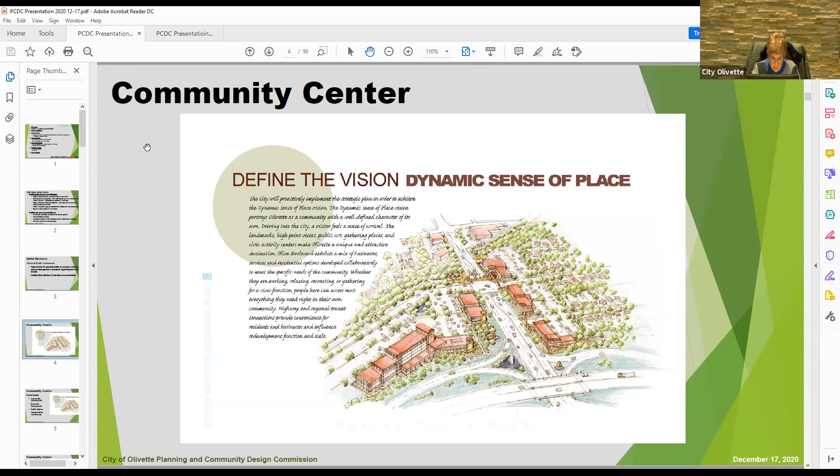In the efforts to become a dynamic sense of place, the commission is encouraged to focus on four areas: community development, economic development, public spaces, and transportation connections. Within each of these focus areas, there's a variety of objectives to meet those goals.

In community development, we talk about equity and various housing types and options, and things of that nature, our identity, our architectural styles.

In economic development, we focus on the Olive Boulevard corridor, the industrial parks, and positioning all of that to be a leader within the region in the St. Louis area.

Public spaces define our community as a well-defined community that's attractive, that has a character of its own, where even the sidewalks are unique and distinctive to our community. The spaces that we create before our commercial areas are unique and distinctive.

Transportation connections don't necessarily just mean the general vehicle, but connections both to public transit, to highways, to county road thoroughfares, to pedestrian areas, to the Centennial or Greenway trails, ensuring the community capitalizes and is well connected both north and south of Olive and east and west of Dielman.

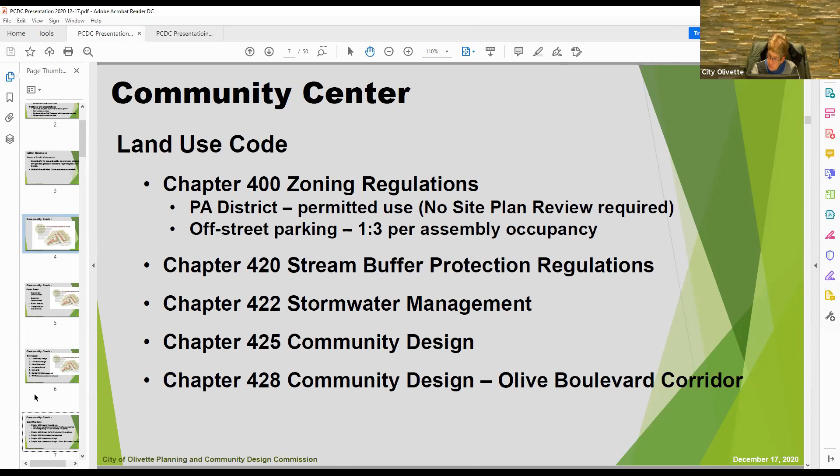So it's a pretty exciting building. For me, of course, it's exciting because it's another check off on our strategic plan of accomplishments.

And I am now going to transfer over to our city manager, Ms. Sondag, Ms. Tucker Knight, who is our Parks and Recreation Director, and also Katie Aholt, who is with the team, serving as our general contractor or project manager for that process.

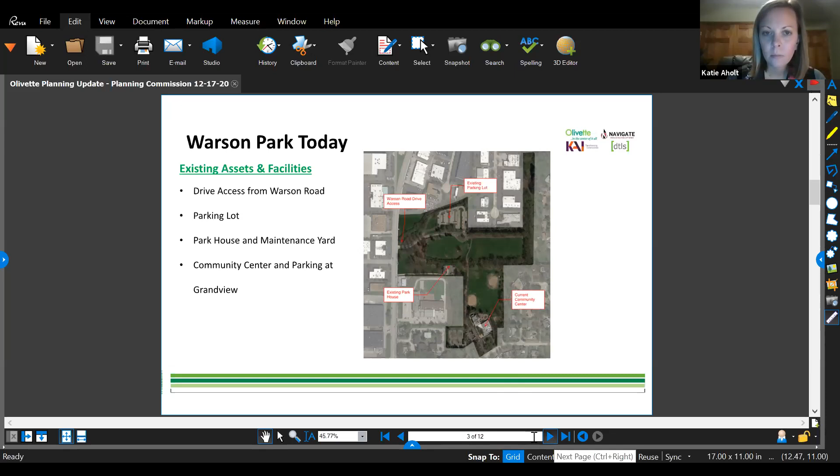Zooming in on the community center site, we are reutilizing the former site of the old ice skating rink. The new building we are designing is a single-story building, approximately 27,500 gross square feet. It reuses the current drive lane from Warson. The project includes mill and overlay of that road and some partial replacement of sidewalks, so we're able to use the base of what's there while making some improvements as part of the project.

We will also be supplementing the existing parking lot with an additional new parking lot adjacent to the building that will provide ADA accessible parking spaces and connectivity with the GRG Centennial Greenway. Overall, we're looking at about 120 existing parking spaces with the addition of 37 new, for a total parking count of 157.

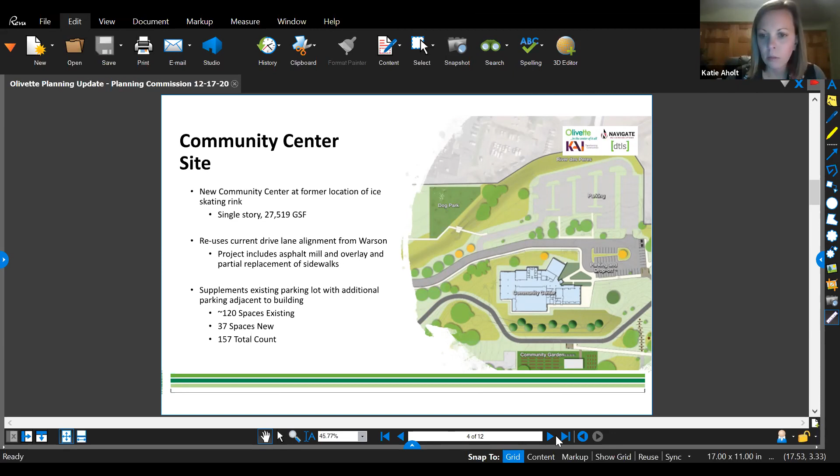The green area represents the Centennial Greenway, currently planned to stop over at Warson Road to the west. For the sake of this presentation, it will turn north and head east into Indian Meadows and connect beyond. The Greenway will provide an opportunity to access the headwaters of the River Des Peres - that's a unique feature to this area.

We are planning for a new maintenance facility to the south of the park. This allows us to demolish the existing park house and eliminate the old retaining wall - a 3-tier retaining wall in very poor shape at this time. We'll be able to grade out a nice slope with some plantings connecting the trail down towards the community center site. Eliminating the retaining wall and that gentle grading of slope, we think, really connects these two spaces together.

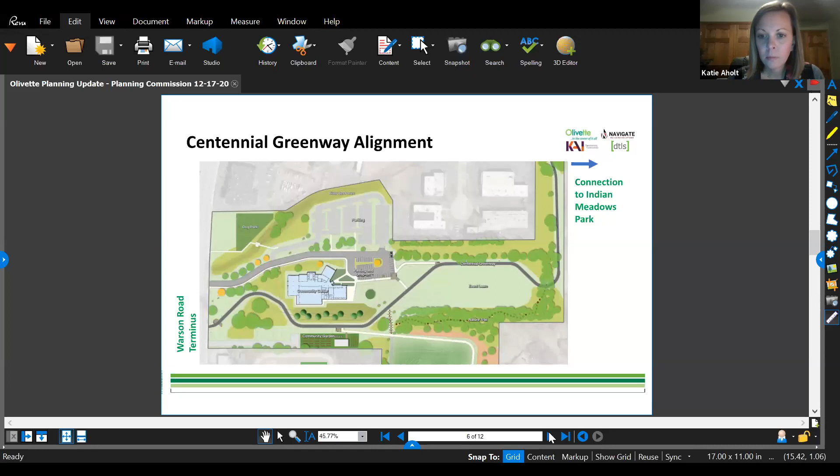So the next slide shows the floor plan as it stands today for the community center. It's about a 27,500 square foot building with multiple spaces for the community to gather and share.

We've had a discussion today about wanting this to be a place where people can come sit and drink a cup of coffee, read the newspaper, or play a card game, or come in inclement weather and be able to walk a path through the building and still feel like they can get some exercise in. So this plan represents those things.

When you come into the vestibule of the building, there will be a welcome desk and also a fireplace area. Beyond that will be a stretch of lobby with informal clusters of seating, which can be flexible and rearranged to accommodate various needs or activities going on in the space.

To the top of the page here, you'll see an indoor playground. This is one of the unique features of this facility, and I think it will be an attraction for people even outside of the Olivette area to come explore what this facility has to offer.

The zone you see here in orange is a cluster of offices. This will be for Parks and Rec staff to support both the facility and what's going on in the greater park system in Olivette.

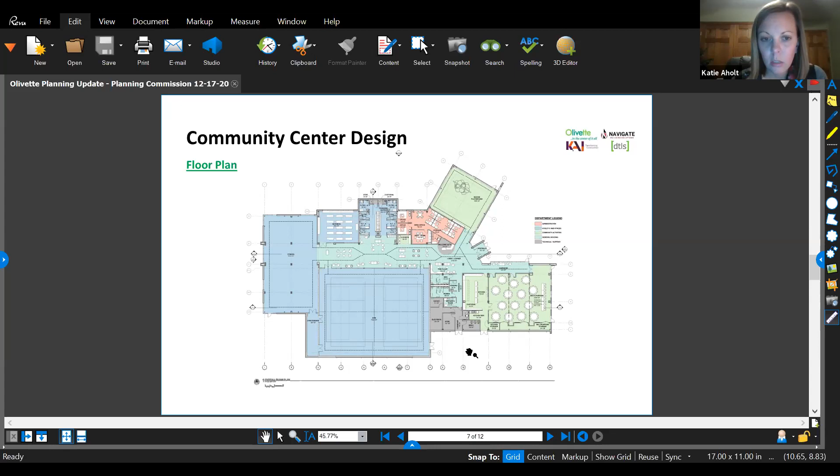From here, I'm going to turn it over to Joel and Aaron and let them walk you through the exterior elevations and the process surrounding the material selection.

Thanks, Katie. I'm Joel Kirshen, project manager for KAI on this project, and with me tonight is Aaron Keistler, director of architecture. Since Aaron was very deeply involved with this and will do a better job explaining his thoughts, I'm going to let him get into the details and walk us through the exterior of the building.

Thank you. Thanks to everyone for having us to show the design of the building. The design team and the city and the Parks and Rec Commission have been very collaborative, and it's been an awesome process to work with everyone.

So this is a view of the front entrance of the building that you would see from the parking lot. However, the next slide is actually what you would first see as you enter the park.

We wanted the entrance to the building to be open and kind of funnel the community into the building through natural materials of stone and wood-look metal panel, and then using a contrasting color of charcoal gray metal panel, kind of to help follow some form and function of the building, but also start to tie into the natural setting of the park as well.

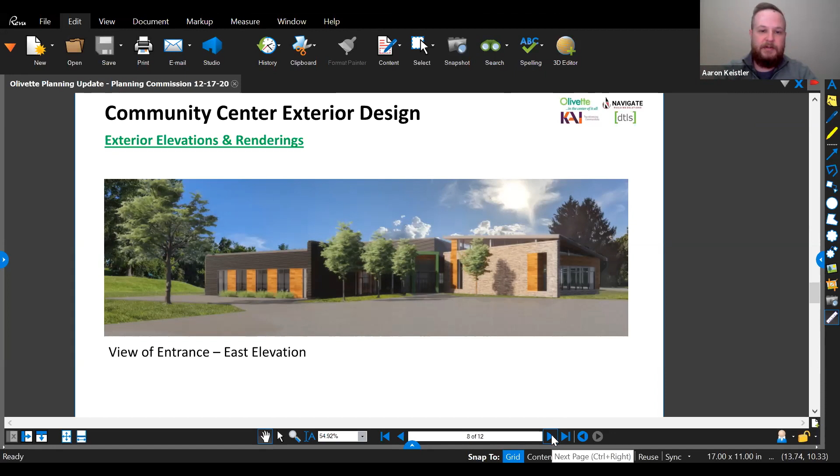So as you pull up from Warson into the park and up to the community center, this would be that corner of the building. The actual entry drive is a little bit lower in elevation from this. But here you can see that green portal that would tie the entry to the building through the fitness. So the corner of the building you're seeing here is the fitness room.

And then to the left of that, the next form is the aerobics room. Then the stone mass form next to that is the changing suites. Then tucked between that and the playground that you see at the end is the office suite area.

And then in the background, we settled on a lighter gray metal panel for the gym so that it fades away into the background and it's not the forefront, to keep the building at a better scale than a 30-foot tall gymnasium within the park.

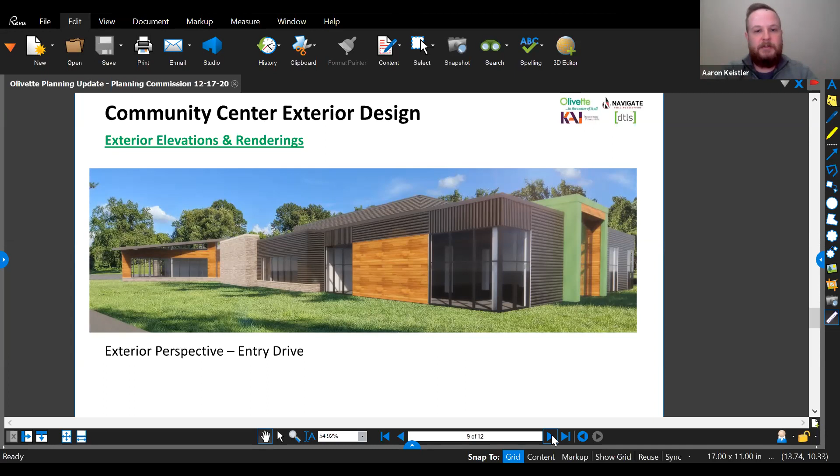So around the exterior, or the backside of the building if you want to call it that - the quote-unquote backside of the building - we definitely wanted to pay attention to that, working with the city, both Parks and Rec and the mayor. We didn't want to just call it the backside of the building and leave it as the backside of the building. We wanted to put a design to it.

So the same materials that you see on the front are carried around the back, with the exception that instead of using the stone veneer you see on the front, we're doing a split-face CMU on the back. That would be the same color palette, just a more cost-effective material. But with the GRG trail coming behind the building, there's going to be a ton of public, both Olivette residents and out-of-town residents, riding their bike or walking or running past the backside of the building. So it didn't want to just be a quote-unquote backside of the building. We wanted to carry the same material palette around.

And here's a better shot of the multi-purpose room patio where events could come in and come out. That could be a part of the package as well, of people renting the space.

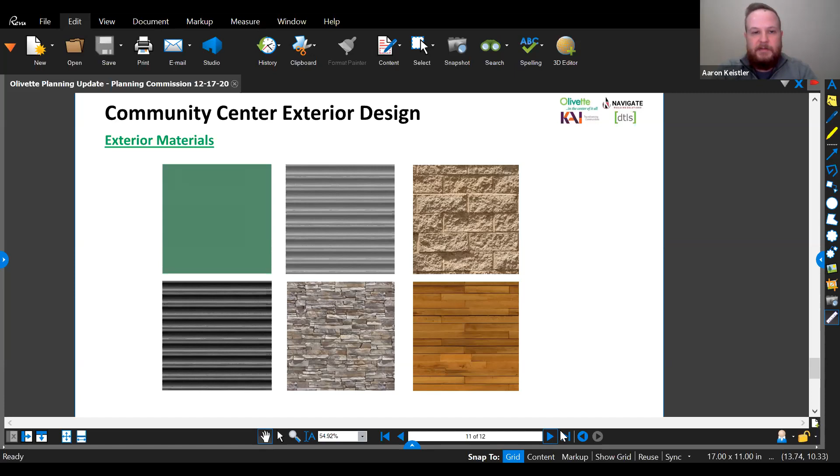Next slide, please. So if any questions or feedback, would love to hear from you guys. Anyone have any comments?

If I might just add a couple of things. One of the things we were trying to do was bring some connection between the city center and the community center, but we didn't want the community center to look like a government building. We wanted it to be warm, we wanted it to be welcoming. Beverly was very keen on trying to bring the natural woods and stone into play here, and those will also be carried throughout the interior of the building. I think Beverly's goal is that warm, inviting place to be, both approaching it from the outside and carrying that forward into the inside.

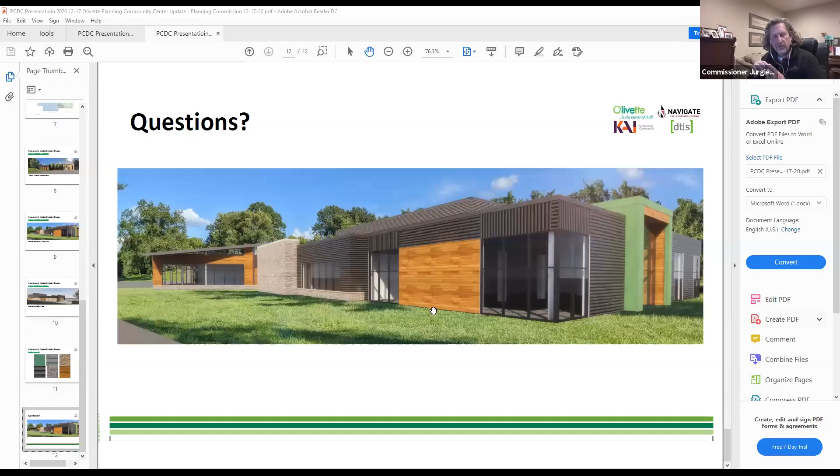I did have one question or comment to make, about the location of that roof ladder for the gym. When you're looking straight on at the building, it looks like you can see it right above the entrance, so I wasn't sure if that could be slid down or moved so it wouldn't be as prominent. I noticed it on the cover of the drawings. We've talked about that in our meeting, and I can't remember, Katie or Aaron, where we ended up with that, because that was something we noticed on the actual drawings, on the cover sheet, on the plans.

The only other comment I had about the gym is whether there will be any natural light let in, in the ceilings or upper walls. Yes, there is. We have a series of skylights included over the gym specifically. We're also trying to incorporate a light shelf running down one edge of that center lobby space, so there will be some natural light coming into that lobby space up against the gym. We're working to keep the edge of the gym that's open along the lobby open, using one of the newer glass products, so there'll be a lot of visibility there. And where that center gathering living room space abuts the gym, there'll be some sloped glazing up at the roof that will allow light in there too.

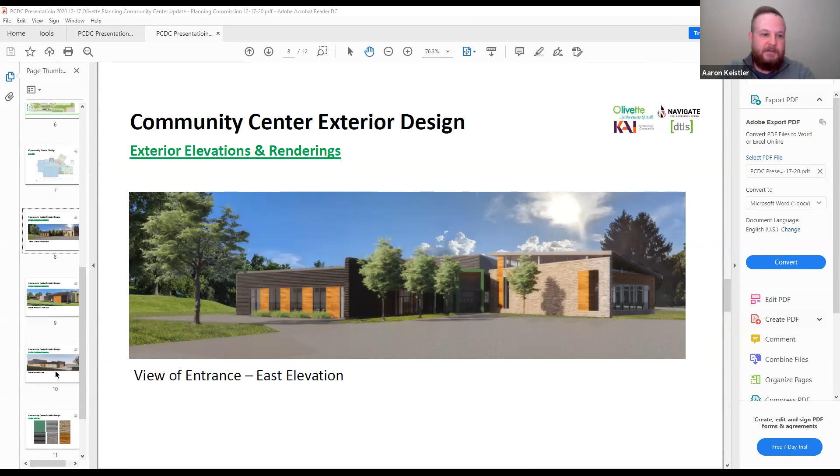It occurs to me that the trail proposed for the south side is elevated, so you're going to be looking down at this building. I appreciate the work you've done on that south elevation, but to me it still looks like a back elevation. I'm not sure how worried we are about what that image along that side looks like, but I do think maybe some more thinking might help, to see what other options there are. I think generally it's nice, but to me that looks like that's definitely the backside of the building.

I appreciate that comment, Mike. We've gone through, we probably have more iterations of the back than we have of the front. Part of the issue is somebody asked about the windows. Beverly and the assistant director, Don LaChance, have both had gyms where there've been windows, and people have had a lot of difficulty playing volleyball or basketball with the sun glare. There are things you can do to help with the windows, but they're really out of our price range. So what we really have is a big wall. We've talked about what other things we could do, and we've talked with GRG about it as well.

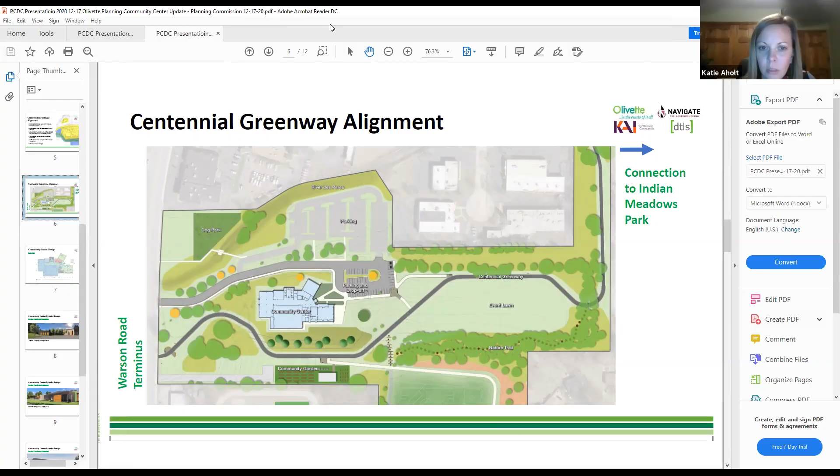Thank you all. I have one quick question. Oh, we were so close. So I have a question about schedule. You know, this looks terrific. So when will we see it in the ground?

Great question. As Aaron mentioned, we are currently wrapping up what's called the design development phase of the documents. The plan is to have those wrapped up after the first of the year. The phase following that is construction documents, when we'll actually start detailing out very specific components of the building. Our goal is to have that package wrapped up by the beginning of May. So May is when we will submit for permitting, start preparing the package for general contractor bidding, and really start transferring from design into construction.

So we're anticipating bidding through summer of 2021, and contractor mobilization in August. Hopefully late next summer we'll start seeing some dirt moving around and some big activity. I think that's exciting. In terms of overall schedule duration, right now we're looking at late 2022 to have everything wrapped up. We think there's potential the building could be completed prior to that, but landscaping is such a heavy component of this project since we're working throughout the park, so we want to make sure we don't cut ourselves short and try to utilize that late planting season in the fall of 2022 to really wrap things up.

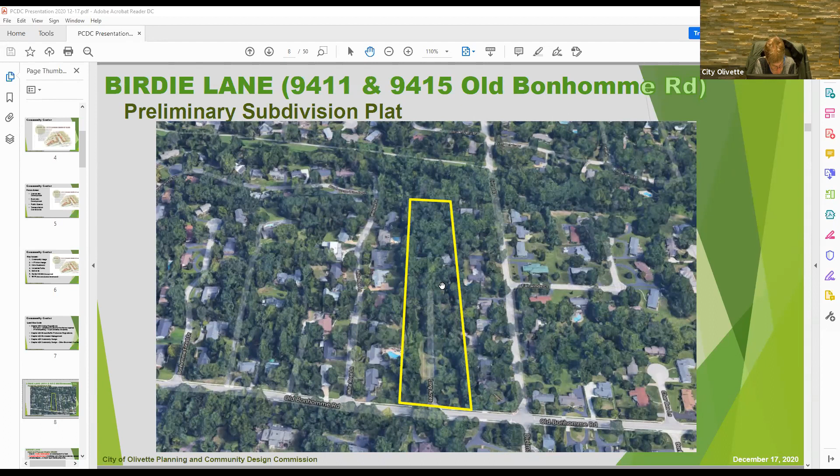So this is the location. It's nestled between Dielman Road on the eastern side and White Rose Lane on the western side, but it's two interior lots, so they don't have any direct access outside of along the south of Old Bonhomme.

The purpose and intent of our subdivision code is to ensure orderly development, to protect and conserve value, both the buildings and improvements and adjacent properties, to ensure proper legal descriptions and documentation. Most importantly, to make sure that they're buildable, properly oriented, and adequately infrastructured with services and facilities for these lots. We establish standards for design and ensure a beneficial relationship between the location and orientation of the lots and the street system, specifically to ensure that safe access and maneuvering of emergency vehicles is provided.

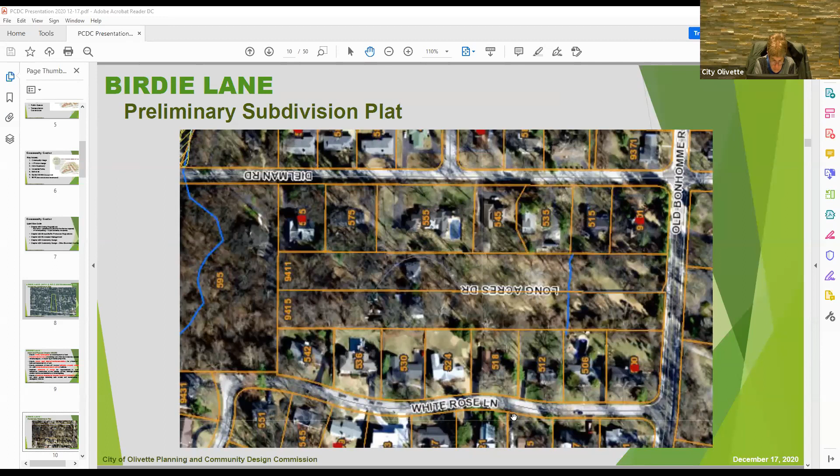This is rotating those two lots on their side now, with the south being on my left-hand side, north being on my right, south on my right, north on my left. Again, White Rose is down at the bottom, Dielman Road up on top. And I just flipped everything. Again, now Old Bonhomme Road, which is the south, is on the right. And you can access the subdivision off a new street that would be extended north to south with a cul-de-sac.

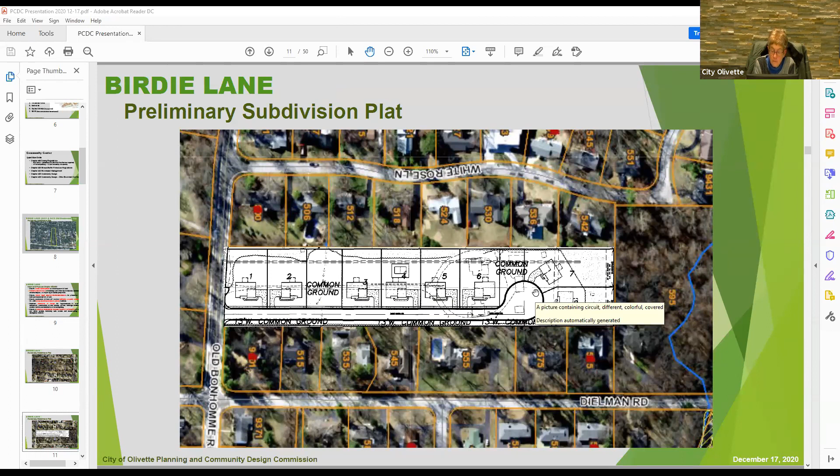There would be two lots, a common ground, then four more lots, 3, 4, 5, and 6, then a common ground, and then lots 7, 8 here at the cul-de-sac terminus. Under this configuration, they would be limited to 8 lots. Without the common grounds or looking at other alternatives for the street, there was potential for maximizing up to 10. We even had discussions about rezoning and density on the site, but in the end, the petition they submitted was for the 8-lot subdivision and providing those 2 common ground spaces.

So our general strategic plan goals are, of course, community identity, economic development, transportation connections, and open spaces. We talked about those earlier. I'm going to go through them now.

The property is zoned single-family residential, which provides for the construction of new detached single-family residences. The minimum requirements for dimensional criteria are 15,000 square feet, 100-foot width of frontage, and 150-foot depth, which these 8 lots fully provide.

From our previous discussions, there's been a lot of focus on Lot 1, and we'll talk about the changes that have been incorporated. There was some discussion of the measuring of the widths for Lots 7 and 8, and we've had discussions about the common ground and the landscaping associated with that.

Stormwater, looking at it from a macro level, because the common grounds being provided are really stormwater detentions that help facilitate stormwater, but more from the Metropolitan Sewer District level. They're looking at it not just how stormwater impacts within the subdivision itself, but also the adjacent areas—at a macro level, where their detention systems will help improve stormwater as it comes down from the higher elevation areas in the west, and minimize impact to the lower elevation properties to the east, specifically along Dielman Road.

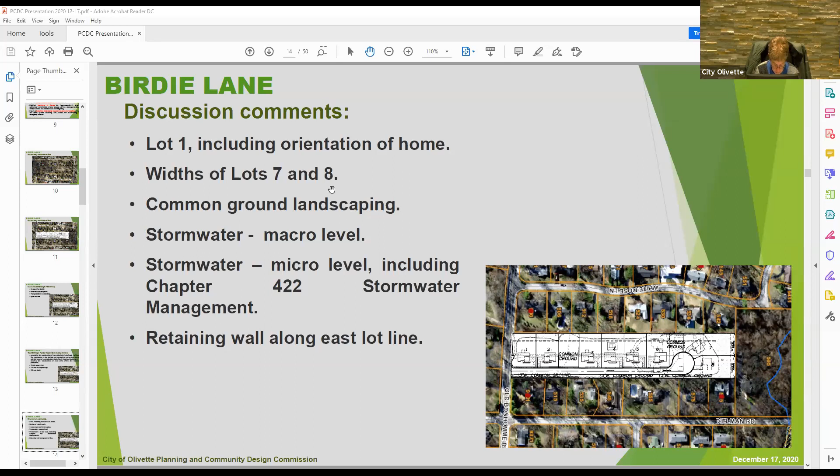Then there's stormwater regarding the micro level, which includes our Chapter 422, where each individual lot has to provide its own detention system—we'll talk about how that's addressed. There was also a retaining wall proposed along the east lot line, roughly behind a couple of properties off of Dielman Road, under that new street.

So long story short, this is Lot 1 that's been discussed by the commission at its past couple of meetings, specifically regarding the design of the new home.

When you look at it from that perspective, that's kind of step 5 in this process, if there was a series of steps. The design of the home actually takes place once the lot's created, and it goes through community design review, our Chapter 425, where our residential redevelopment design guidelines come into play, and the commission has authority over the design.

I think the commission's made it very clear in terms of their expectations for when this design comes in for the new home. Right now, we're looking at a preliminary plat and whether this lot can be subdivided—it's specific to that. From a staff perspective, the issues regarding design, though they come in later, matter because the more narrow a lot you have, the more restricted the design would be.

So from our end, we've been trying to coordinate and work with the developer, finding opportunities or ways to deepen the north-south depth of Lot 1, therefore providing more opportunities in the design that comes further down the line—what we would call step 5 of the process.

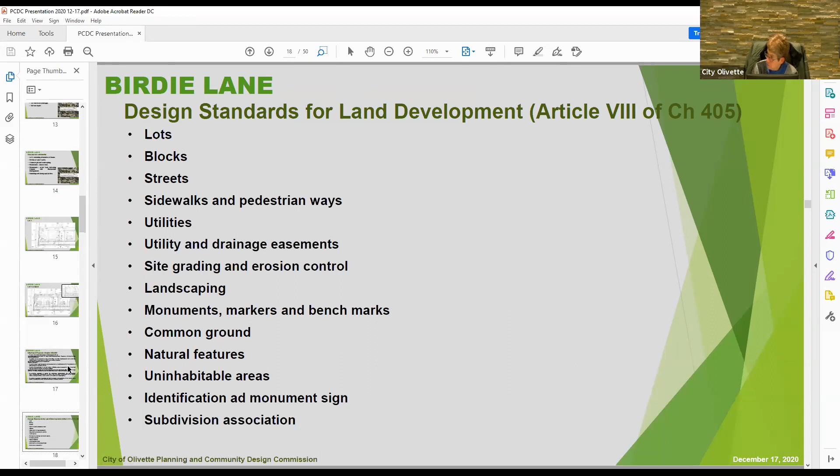At this point, I'm glad to answer any commission questions regarding what we tried to do with lot 1 and lot 2, because a majority of the discussions have really been focused on those. We're hoping that working with the developer in this collaborative response, reducing the common ground area and increasing the width of lot 1, will be sufficient to address what the commission's concerns were. From a staff perspective, this gives greater flexibility because the lot was really constrained, and that was more of a concern to me because it would limit some creativity. Now I have a lot that is a corner lot, but it's an oversized lot compared to the others, and would have more opportunities to provide flexibility in design, specifically the Old Bonhomme design.

Chair, before continuing, I know Jonathan has had other discussions, and I'd like him to address some of his comments and thoughts since he assisted in putting together that report. Sure, but first, before going on, I'd like to focus on getting lot 1 addressed, because holistically, for the subdivision as a whole, this has been the holdup. Anybody have any questions for Carlos at this point before we hear from Jonathan?

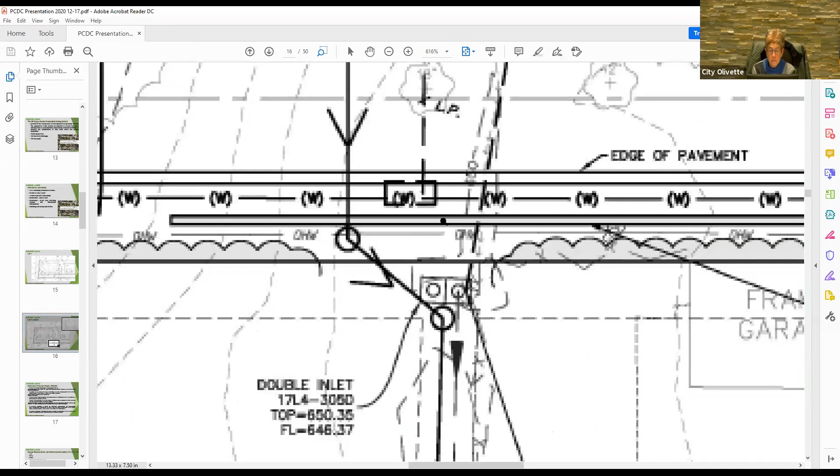There is a dip, and you can see why those detention systems are right in this area, which is where the highest point of the wall is at, 8 feet. Is there going to be a fence on there, Carlos?

It depends. It says fence. Okay, it says proposed retaining wall with fence. I know from a building code perspective, it depends on whether that's a walkable path. There is a roadway right adjacent to it, but it depends on what that distance is. In this case, they're showing that they would put a fence on top of the wall.

And if we can verify that with the petitioner, after some questions. Jonathan, did you want to talk with us? I think Mr. Trejo did a nice job going over most items.

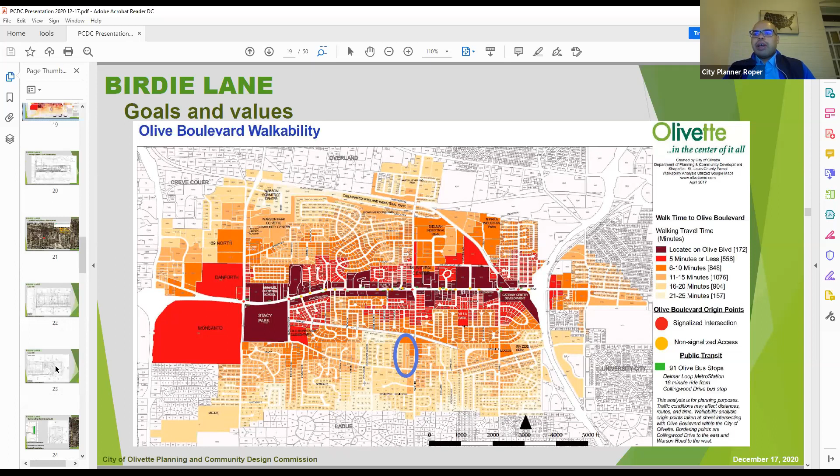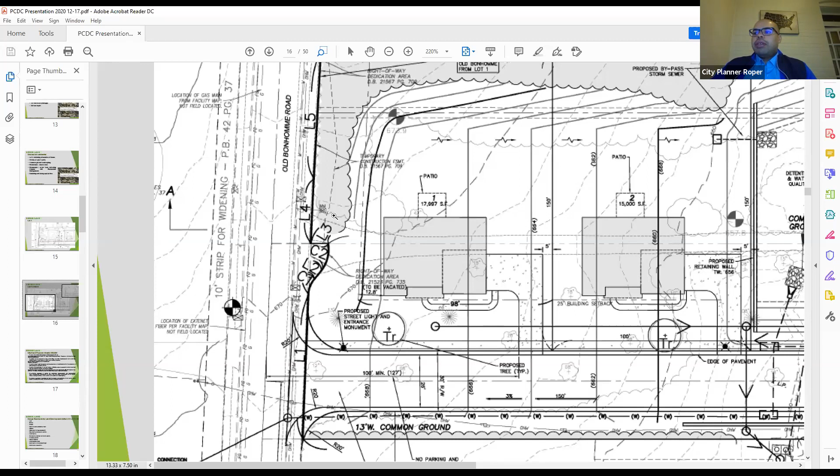Staff wants to stress the common ground area, and although there are landscaping requirements, I know Mr. Freeman on previous meetings shared a lot of nice landscaping on the street side, but also the common ground areas being that 13-foot width, and the stormwater areas - hopefully the expectation is a little bit more emphasis than just plain grass, but put emphasis on there.

The petitioners have also put what the Chapter 405 subdivision regulations calls a pedestrian way, where if there's opportunities to connect to any parks, walking trails, Olive Boulevard, commercial areas, or schools, take advantage of it. So in this case, they are putting an easement and curbs around one of the common grounds and around lot 7, if a future connection were to be made. I believe that is all I have at the moment.

Carol, I have one question. Again, Rob? How deep is the retaining wall between lots 2 and 3? Or, how deep is the water retention, and then the retaining walls on either side? I believe it gets up to, at that point, 5 feet.

So I'm going to look at it right now. I believe those two are both 5 feet. So by building code, I believe they would definitely need some type of railing or guardrail, just so someone can't walk right into it. 'Cause it's not shown if they're planning on putting something above that. Well, they would, with the building code, they would have to.

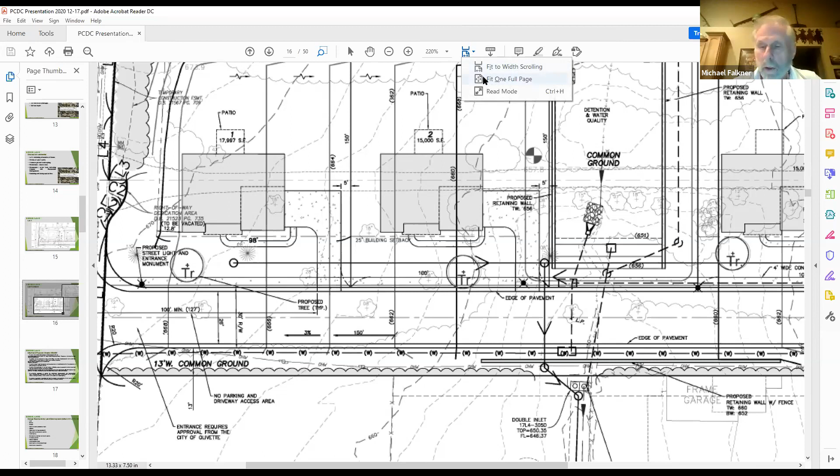Okay, Falkner, do you want to go ahead? I'd like to try and go over some of the concerns. Yes, thank you very much, Madam Chair. I'd like to go over and talk about some of the comments made by the commission members. I think number one is this property has been surveyed.

As far as that one individual who had indicated an issue, we'll be happy to meet with him. But this is a property surrounded by plats that have been recorded. We went out and found all the corners, all the record corners that are out there, and performed an outboundary survey on this property. We've actually got an ALTA survey on this property, so we know that the points out there are correct, and we will stand by those. But we will be willing to talk with any property owner who has concerns over those locations.

As far as the wall, yes, there was one individual who had indicated a concern about the wall, but his concern was more about what the wall was actually going to be and its color. As we stated in the hearing, we'll be happy to reach out to that individual, since he'll be looking directly at that wall, and discuss what type of color he'd like to see along it. Of course, we'll also pass that by the city to make sure they approve the color. It's going to be a modular block wall, so it can be in many different colors. We'll be discussing that with the property owner, since he'll be most directly affected by the visual of that wall.

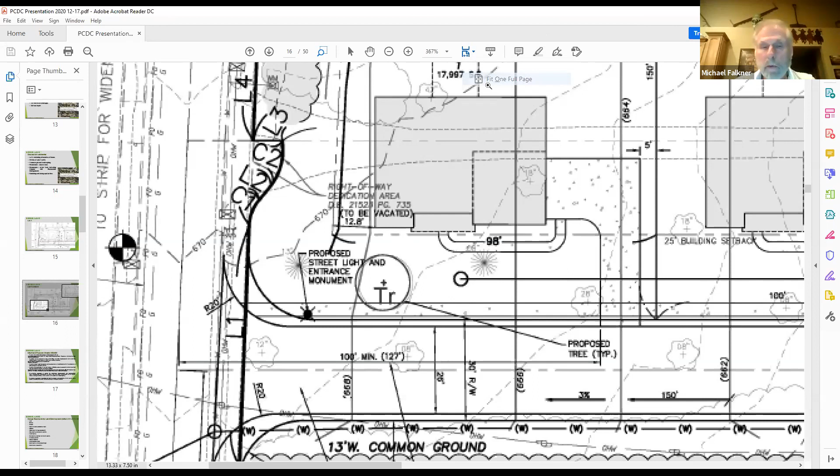That is correct. That would put the house about 28 feet, I'm sorry, an additional 12 and a half foot off of the 25-foot setback. So we'll be at 38 foot off the right of way.

But to answer your question, Carlos, yes, that distance now is 98 foot. That was due to discussing with MSD and allowing us a 30-foot setback off of the high water, so the house and driveway could exist within that area, which afforded us the opportunity to flip Lot 2's house, allowing us to move that 13 to 15 feet into Lot 1.

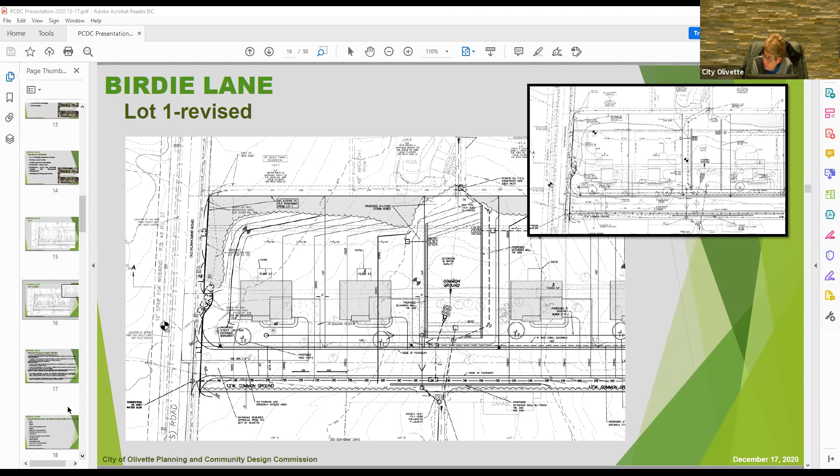There are none noted. We do have a revised plan set that you received PDF copies of today, and we've kind of gone through those reviews. I think they address the core issues, or a majority of the discussion comments that we heard over the past 3 meetings, which was regarding specifically Lot 1.

There were some good questions brought up today as we got closer to specifics on the grades, but those will be handled through subdivision improvement plans. The question before the commission is whether the commission is comfortable with the design, if enough emphasis has been put in about the expectation for the design of the home on Lot 1, which, again, in the previous 2 meetings, there was quite a bit of discussion on. The other things have been addressed.

There's still 2 issues that are kind of outside of the control of this permitting or the preliminary plat process. One, of course, is the retaining wall. The commission doesn't have authority to approve the retaining wall as one wall. That's something the commission would have to refer to the Board of Adjustment. Talking with Mr. Falkner, I think that's something they would pursue. If it's not approved or authorized, they would just continue with the design of tiering that wall, but they're concerned about how that would impact the garage.

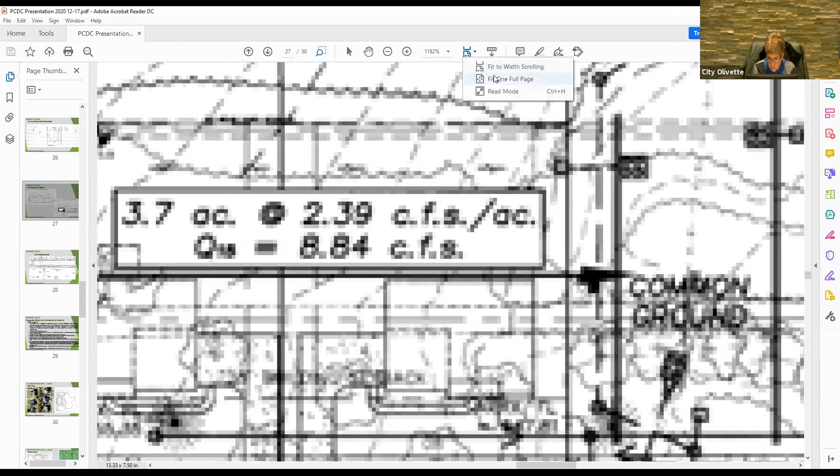When we put that ordinance together, they took into consideration all of this, and Chapter 428 is just looking at an individual lot. Again, it's kind of double dipping in the process, for lack of a better explanation, because we never anticipated that we would get an 8-lot subdivision. Most properties have already been subdivided, so it's rare that we see those.

So I talked with Mr. Falkner about that, and I think it's something that from the city level we should have a continued discussion about. It doesn't impact their preliminary plat in any way, but it will become an issue we'll have to address as they pursue individual lot developments on there.

Hey Carlos, this is Mike. Are you suggesting that the detention calculations have taken into account all the roof areas and what'll be coming out off the buildings, like what's required for individual lots, but that's already being taken care of on this macro level?

That's correct. In the preliminary plat, and as you get into the more detailed plans with the paper copies, they're showing all the downspouts, let's say in lot 1, are connected to a drainage system here that runs and releases into the common ground. That happens for lot 1, lot 2, lot 3, 4, 5, 6, 7, and 8 going into the front. But the rear roof areas release at grade, which is why they provided that undisturbed buffer area.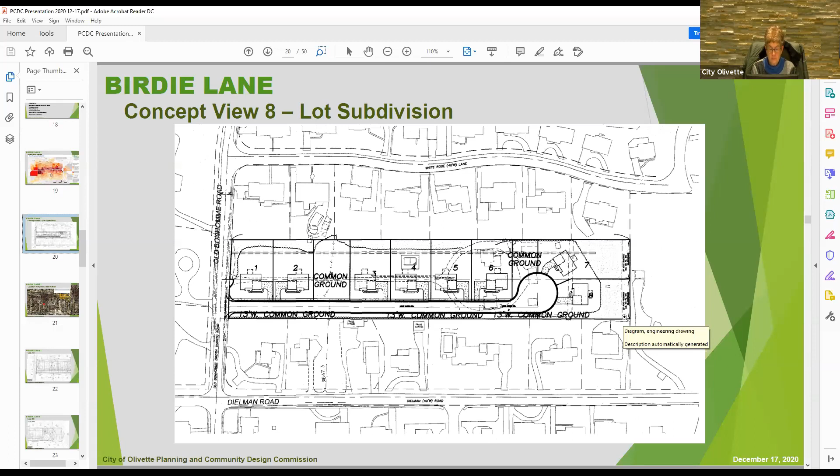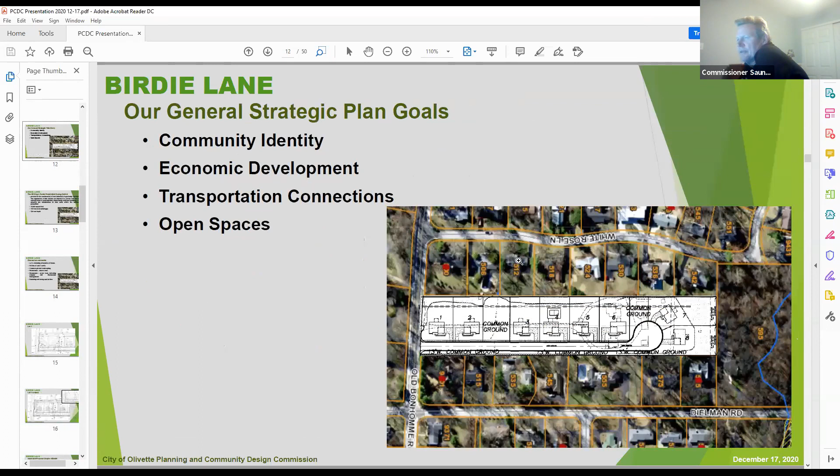But just by the fact that they're tied into a structure already, isn't it in fact being addressed at that point in time? So it meets the spirit and the intent of Chapter 422, however it's not compliant with Chapter 422 wording. We'd have to come up with some type of amendment, but not necessarily an alternative—just an acknowledgement that the detention system is being provided in the common ground areas as opposed to on the individual lots.

Interesting problem to have.

But it's still going to be piped, right? We're still controlling it. The downspouts are still connected—is that piped or is that just a swale back there? That's actually a physical structure there, isn't it, a pipe? Yeah, on lot 2 there begins an actual inlet that leads into the common ground, also on 3 and on 4 as well.

So is it a pipe or is it a swale? It's a pipe. However, one of the items we would look at is where the actual downspouts are going to be, because part of it is trying to lessen the overall water leaving, let's just say Olivette in general. The second component is where water from the downspouts and hard space areas is impacting your neighbor at a lower point. That's the item we would look at more closely during the planning commission stage, or during the community design review stage.

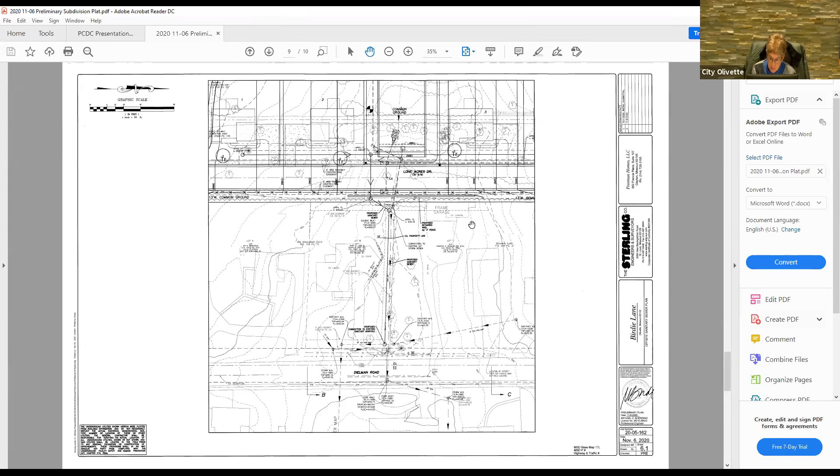Jonathan, so we should get back to the preliminary plat issue. Does anyone have a motion or any further discussion about the preliminary plat itself?

This is Mike again. I do have a bit of concern about the first condition, if we could pull that motion back up. Absolutely—one second, sorry about that.

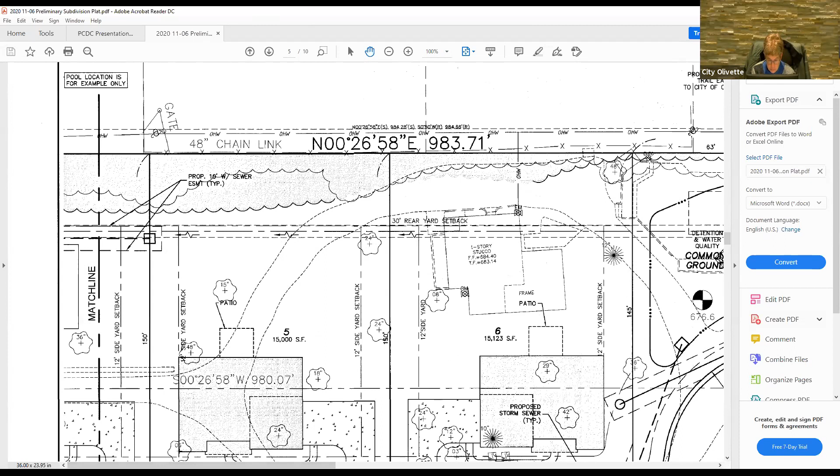Item number 1, design expectations for the proposed home on lot 1. I'm not sure about the other commissioners, but I think that's a bit vague. I think we've made all our expectations clear, but I don't know that it's clear with the way number 1 is written.

I'd be curious what other commissioners think. What are you thinking would be better stated there, Mike? How might we better express that? I guess the question is, is everybody else comfortable with this?

We've made it pretty clear that we expect the house to at least have the appearance of a front elevation facing Old Bonhomme. But if I read this 5 years from now and everybody's off this commission, is it clear what that expectation is? I don't think it's clear.

So I think maybe just state it like you said before, very well, very clear and concise. So we're not designing houses at this stage. No, we're not, I get that. I absolutely get that.

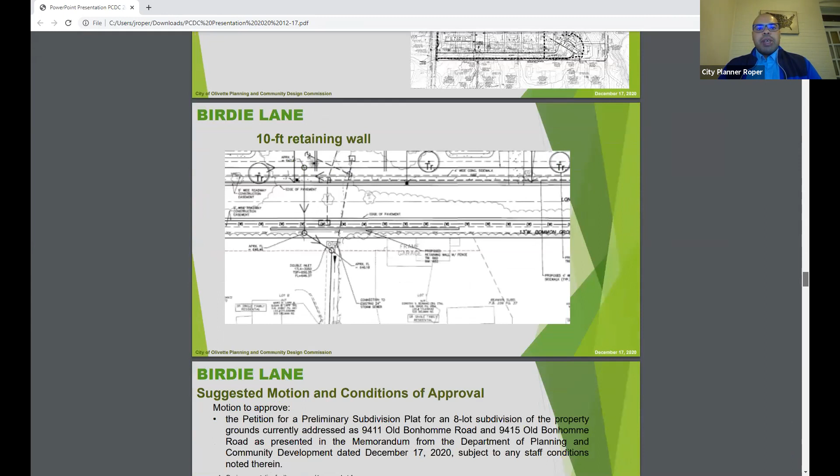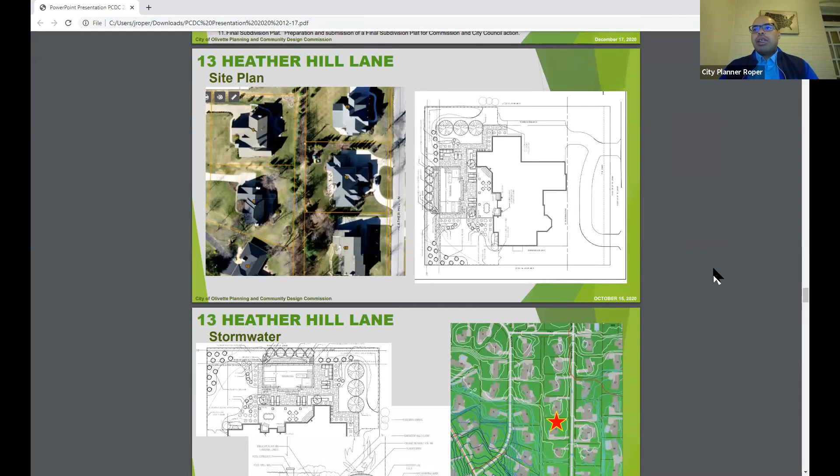Good evening to the members of the Planning Commission. My name is Jonathan Roper, and I will be going through the first of two petitions for new business. The first is a pool and patio accessory structures at 13 Heather Hill Lane.

What is being considered, excuse the date on the bottom here, is the size of the overall patio space on site and the overall accessory structure area, which is being requested to exceed what is permitted administratively. This is 13 Heather Hill Lane, where the site currently has a rear patio. They would like a 600 square foot pool in the back, along with a paver patio around it on three sides, along a little bit of a walkway.

Under the code, Article 16, accessory structures and uses, a lot this size can have a pool up to 600 square feet, and that's the size they're applying for. So that would conform, along with the setbacks, 10 feet from the rear, and it has to be within the side yard setbacks of the lot, so the pool would comply.

Regarding the patio space, it's not limited on the number of patios, just the total area of patio on site. In this case, they're allowed the greater of 500 square feet or 5% of the lot area, and they do exceed the 5% of the lot area. Another part of the code looks at a site being permitted up to 10% of the area of the lot, and in this case they are also looking to exceed that area.

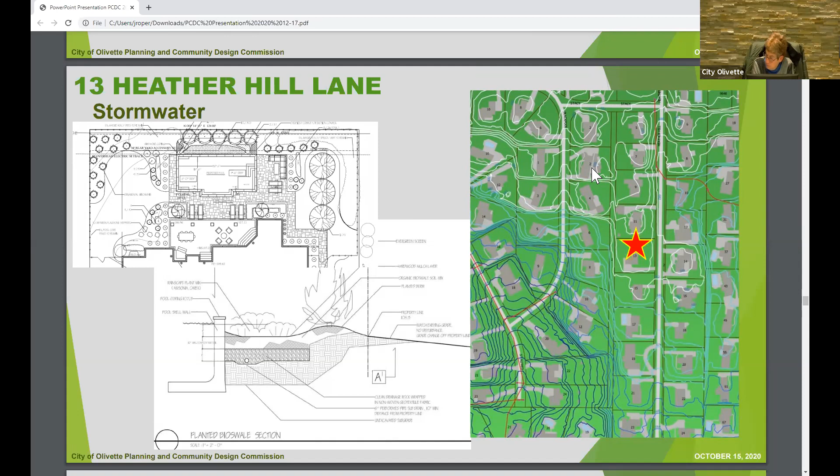Interesting. All right, chair, I do have, I believe, the petitioner. Is that Mr. Ringhofer? Yes. That would be great. Did you want to address the commission, sir? Are you Mr. Ringhofer there? Yes, yes. Okay, sorry, it was muted, I was trying to find the button.

Very good. Yeah, hi, this is Eric Ringhofer, I'm with Green Guys, I'm the landscape architect who laid the space out. I think Jonathan did a pretty good job explaining everything. We did pay a lot of attention to stormwater, that was one of the biggest things here, and just the efficiency of pavement spaces. I know the Busker family has 3 daughters, all fairly active.

So it's going to be an adult pool and a child pool, trying to balance what they're looking to get for the house and also being good neighbors was really important. So the space is really kind of dialed down to as minimal as we can, and with all of the substantial plantings on the perimeter already, plus everything we're adding, plus all the additional stormwater remediation, I think we're going to make this stormwater actually better than it is currently. So hopefully you guys see it that way as well, and we're looking forward to contributing to the overall community with this project.

Sounds great. Anybody have any questions for Mr. Ringhofer?

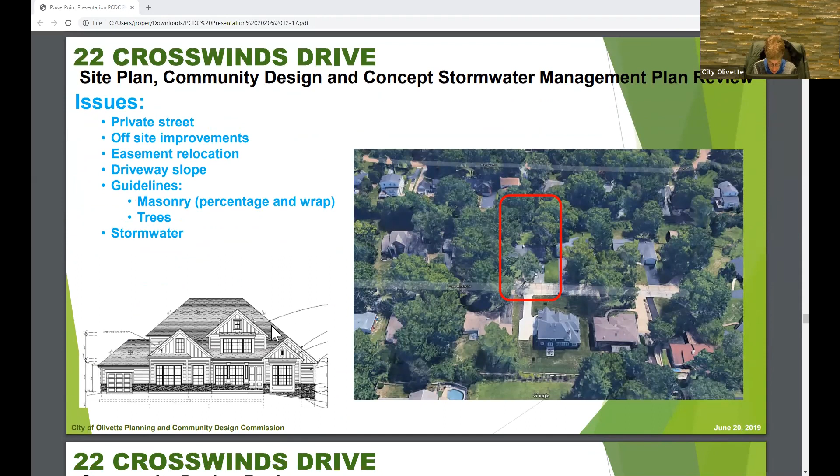And I'm going to let Jonathan read it. It's 22 Crosswinds Drive. The petition type is site plan, community design, and concept stormwater management plan review. The description is for a new single-family home. The petitioner is Mark Manlin with Daiquium 913 LLC - I'm not sure if I pronounced that correctly - and the property owner is Daiquium 913 LLC. Is it Jonathan or Carlos - talk to us about that. I'll start it off and then take it over to Carlos.

Thank you. We have the second new business item, the new house at 22 Crosswinds Drive. It's a 2-story building with a recessed front entry garage and a side entry garage as well. It's in the Crosswinds Bonnier subdivision, where there's a mix of existing ranch-style houses with shallower roof pitches and newly constructed homes, including by the petitioner currently, on the street as well.

Looking at the community design review, staff finds that the proposed house is adjacent to two one-story houses that have pretty shallow roof pitches. The massing component and the roof transitions would comply with the guidelines, as the two nearest pieces to the sides are either a hip roof or really a one-story component there.

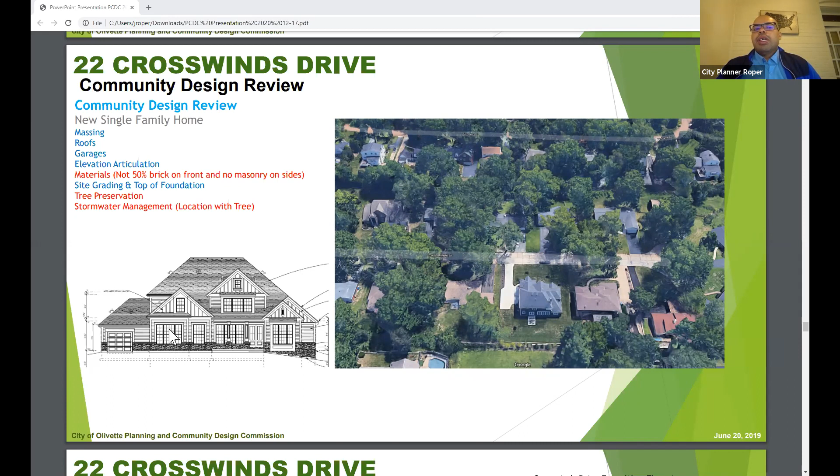The item that staff would say would not comply regarding the front elevations would be the 50% masonry or brick requirement. The guidelines call for at least 50% masonry or brick on the front, wrapping around on a side elevation. One of those side elevations is in question regarding that wraparound. You can see the masonry on the lower edge here is not 50% as the guidelines call for. Staff honestly needs clarification and guidance from the commission on this side elevation.

So here is that main wall elevation, but there's also this piece over here that staff wasn't sure about—whether it was the commission's intent for the masonry to be on this wall as well as that wall, or if that's fine. Staff is bringing it to the commission's attention.

Staff also points out this elevation because it's not the largest or most significant wall, being a one-story section with a hipped roof. There are a few windows on it and not a big elevation change that exposes the basement and lower level. Staff pointed this out because if it were a longer wall or a two-story wall with just two windows, it would definitely not comply with the guidelines, but staff isn't sure in this case, so we're just pointing it out. That was really it for the design component.

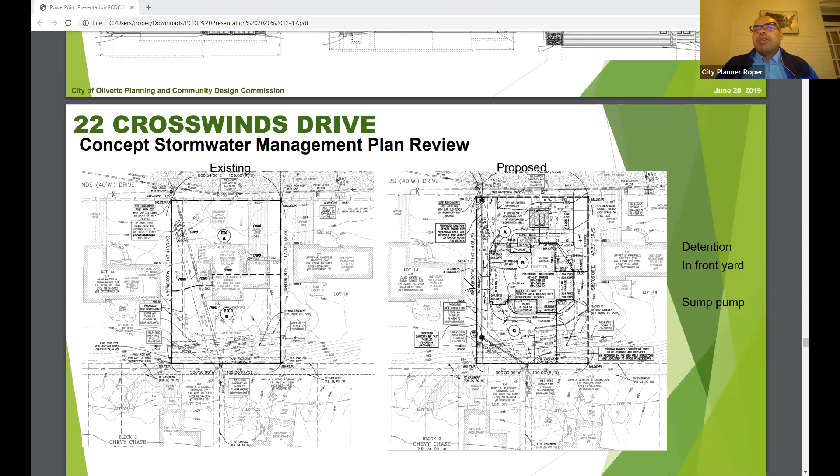The most major thing on this site would actually be the relocation of a sanitary sewer line, here in the Chevy Chase neighborhood. There exists about a 10-inch pipe that runs along the property line from the back, and currently it juts out at an angle towards the southwest corner of the lot. There's a 10-foot easement, and the house is not over it, but it comes pretty close.

The petitioner is looking to relocate that line to this easement here, moving it from where C is to closer to the corner, angling towards the southern property line and traveling up along their line within a 10-foot easement.

Currently, their plans are under review with MSD for that relocation. Staff has not received any indication that MSD has approved that plan from them yet. So if the commission were to consider approval, it would be a condition that MSD approval is required.

Staff also notes that with this easement, the sanitary line flow line - let's say this area inlet right here is a 582, and the contours show a 592 right here, a 591. So this flow line is literally 10 feet down in the ground. There's a pretty substantial dig along this property line here, but also in the back here. The real concern, besides someone's house, is also this driveway back here.

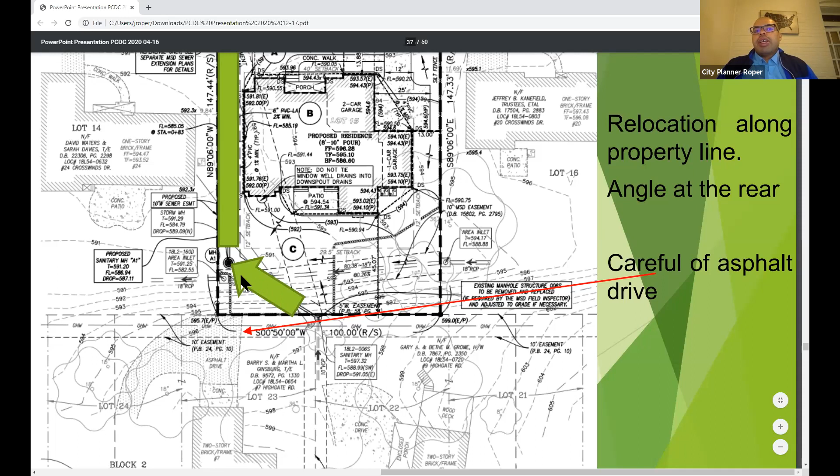There's an asphalt driveway that actually goes to the property line, at an elevation of 596. So if they're digging this pipe here, staff just wants to make sure that at the bottom of the hill, which is already 5 feet down from this point to this point, but you also go down an additional 10 feet, you're 15 feet in the ground - hopefully you're not going to mess with the stability of this driveway over here.

Hey Jonathan, this is Mike. Are you mixing up your sanitary lines and your storm lines? Because I think the one you said, and maybe I'm wrong, but that's the sanitary line you're talking about there, and I think the one you were pointing out, if it's an area inlet, that's a storm line. So I think they're two different lines.

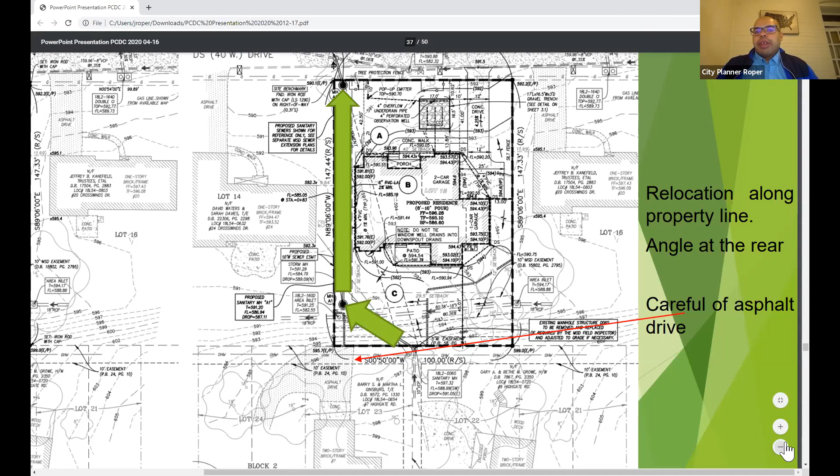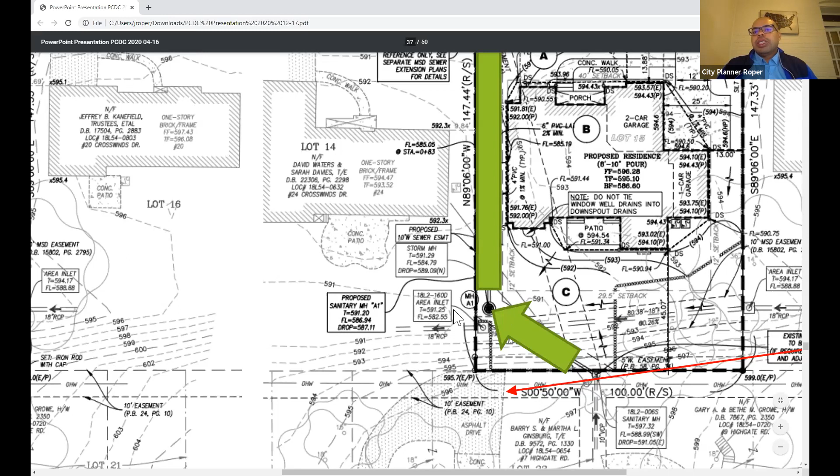Yes, you are totally correct, let me correct myself on that one. This is the flow line here. So I mentioned it was a 582 flow line - where did I just... oh, I know what I did, there we go, I noted a 582. I'm sorry, the flow line's 586, so it's 5 feet down in the ground, not 10 feet.

So same concern still exists, which is digging down deeper in the ground. It's not as deep, which is a good thing, but there's still some - staff's just bringing it up. I don't know if there's anything to be concerned about, but we want to make sure that the stability of this asphalt driveway is okay, as well as this easement is moving. They really need to coordinate with both of these neighbors regarding the placement of this easement and this sewer.

This is not a normal project for a single family house to happen. Usually you're not moving a sewer, especially along the property line. So all the other neighbors that are abutting this easement need to be coordinated with by the petitioner.

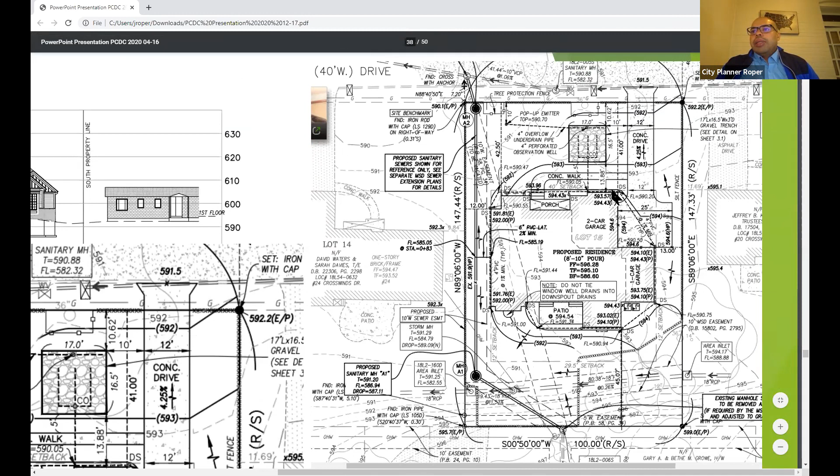One of the items staff's looking at, and we are going to ask the engineer for verification - the current driveway, they're noting it's a 4.25% slope. Mr. Trejo had some calculation that was taken, and the calculations coming out were off, actually a little bit steeper than what was being calculated. So there's been a condition of approval that notes some spot grade elevations being asked for if it is truly 4.25, because I believe it was around 5 or 6%, which gets much steeper, as calculated by staff at the time.

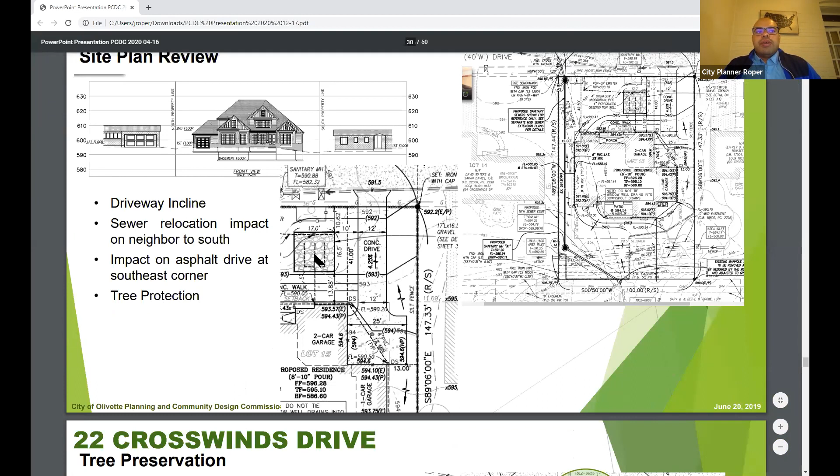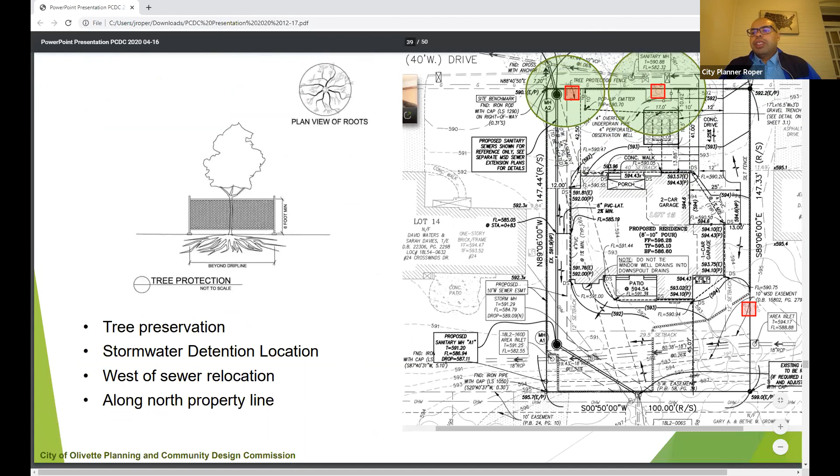And finally, tree protection - the guidelines do call for trying to save trees or maintaining healthy trees. There are 3 trees to point out. There's one here along the north property line that they're indicating, showing the root system around, which the house is probably going to be impacting.

They would really need to talk to this neighbor to the north about it, because there's nothing worse than something happens and then the neighbors say, well where's my opportunity, and it becomes an issue. So we want to make sure they're fully acknowledging that tree, but also these 2 around the street here - they are showing red boxes, that's the tree protection fence, and the green shows relatively the caliper or the root system of the tree and the canopy.

I know tree protection says not to scale, but the sections shown on the site plan and the site plan detail don't match up. One shows it beyond the drip line for the tree protection fence, while this one shows it's like 3 feet from the tree. So they're going to have issues with the placement of the detention near that tree, and also probably the sewer line, while still keeping that tree.

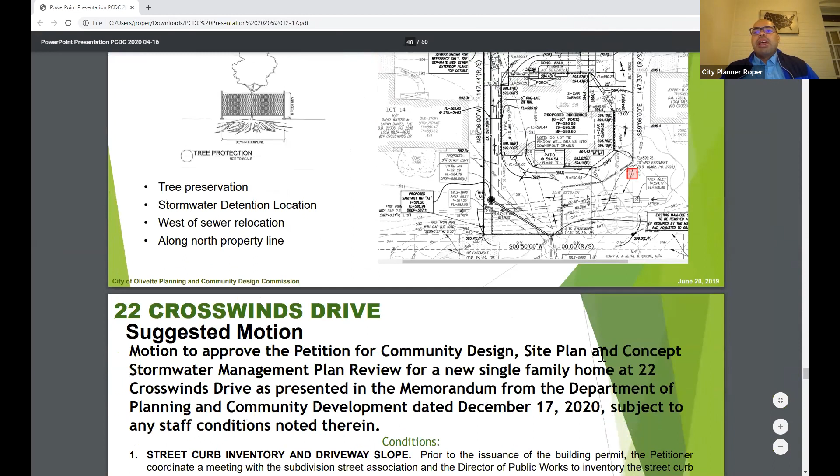With that, there are different conditions of approval that staff looks at. The street curb inventory and driveway slope. I'll take the street curb inventory. That was a newer one that also came up on the other petition at 828 Newcastle. So that was a newer item, but we need to make sure the director of public works is coordinated into a meeting about the street health and that curb there.

Also, to verify that the driveway will not exceed 4.25%. They should take a look at reconfiguring the detention to lessen the impact on the tree. Otherwise, in a couple of years you just might have a dead tree due to water or the impact, and that's a lot more expensive to take down.

Discuss the tree preservation with the neighbor to the north, the one on the property line. Location of the sump pump - we want those to be in an area that's not going to discharge at the neighboring house.

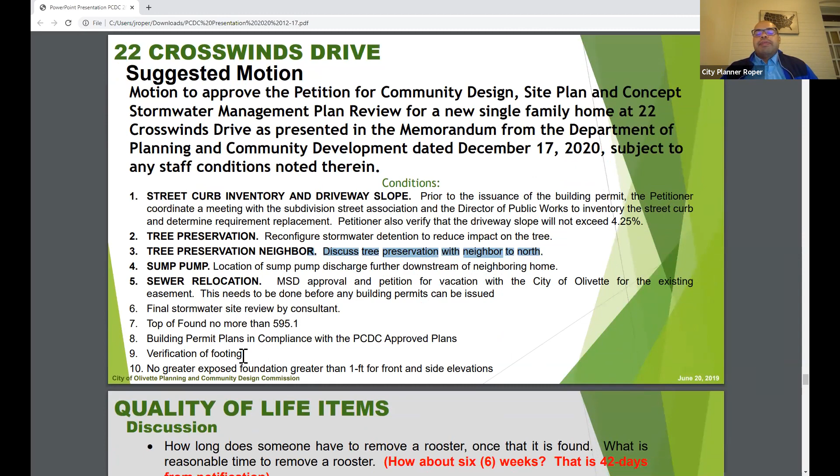The sewer relocation - according to the City of Olivette, chapter 405 subdivision regulations, any utility easement needs to be applied for through a vacation. So this would still need to have a vacation through the plan commission, and also a public hearing through the city council for that vacation. So this would be an approval of that, but also MSD approval. And finally, the other normal conditions of approval.

With that, I'm open for any questions or comments the commission may have, and the petitioner is here this evening. Any other questions by the commission?

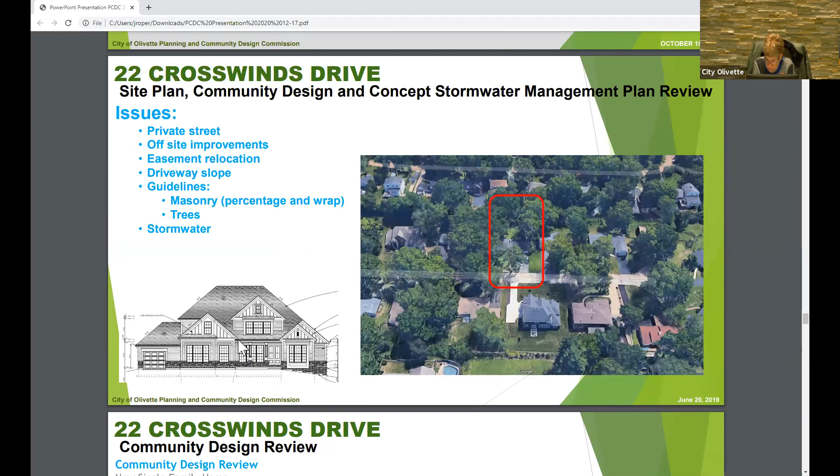Jonathan, do you have, or Carlos, do you have anything to add to that? Going back to that first slide, or really the questions, we're waiting on responses from the developer, who needs to respond back to the commission. These are reflective of the earlier review letter that was issued by Jonathan once we had received the application, and they were part of the staff report.

So I do have Mr. Manlin, and again, the goal here is for him to respond to these points. And Chairman, if it's okay, I'd be glad to. I'd like to hear from Mr. Manlin if nobody else has any questions at this point. Why don't you bring him in? Jonathan, I am going to, let's see, bring you back. Bear with me.

Good evening, can you hear me? Yes, okay good, good, thank you very much. I appreciate it. As you spoke I took notes, and I'll just kind of work my way down the list.

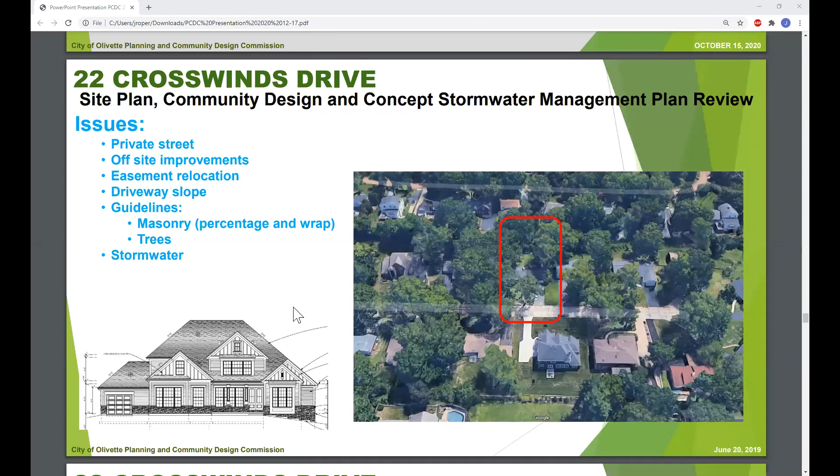I guess my overall comment would be, we're trying to accomplish a kind of craftsman modern farmhouse style, and I don't think this elevation is deficient in terms of capturing that desired architectural style. I think just merely adding additional stone or brick or masonry wouldn't enhance the appearance, in my opinion. We think it's unique, but that being said, it is in sync with other homes that have been built recently, and again, I provided photographs of some newer built homes to illustrate that.

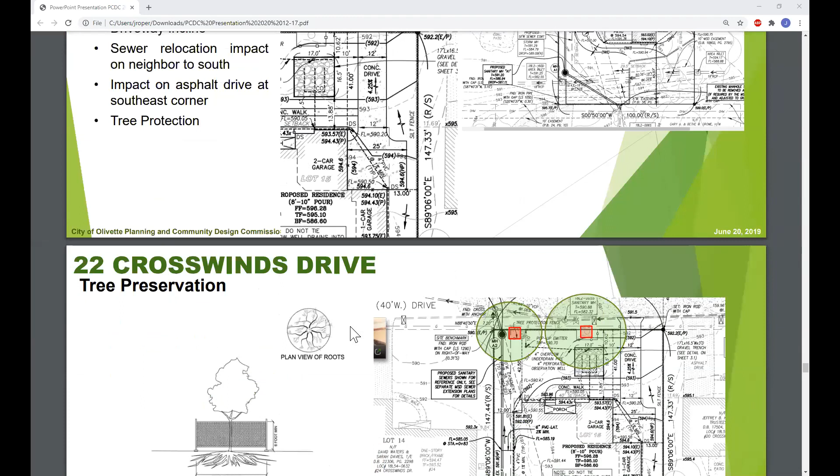I know there was initially some concern that it was too close to the driveway, and I instructed my engineer to relocate it. I'd certainly be willing to give further consideration to moving it further away, but I can tell you that the location of it is not random. There's a thought process involved with that.

And again, if we could modify it and get it further away from the tree, we would certainly be open to that for sure. The other possibility would be perhaps to have a licensed arborist look at the tree and the site plan, its proximity to that particular area, the detention area, and get their expert opinion. So we can go either way on that.

The sewer issue, we've gone through the process with MSD. We've gotten comments back. The comments from MSD I would characterize as minor in nature. We were supposed to get back comments today, and we were hoping that they were final comments and that we can proceed with an actual approval. As of 3 o'clock this afternoon, I had not received confirmation from my engineer, but MSD's comments are forthcoming, and it could be as soon as tomorrow.

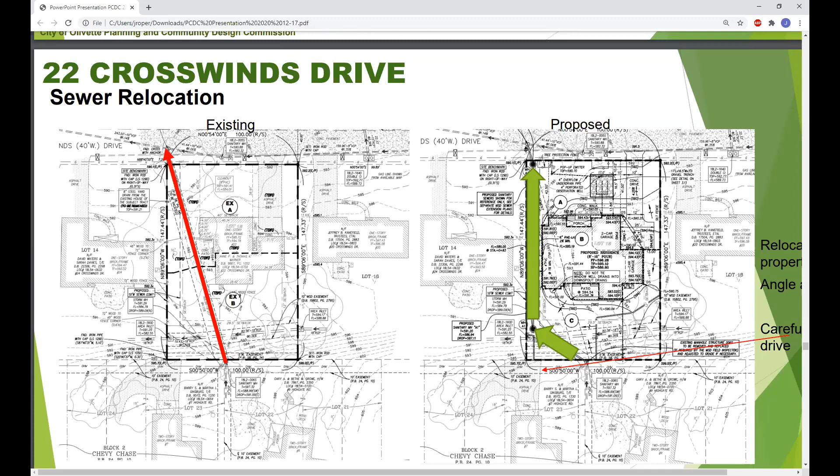Driveway slope, again, that's something we can look at. I do see a notation that the engineer had called out a 4.25 slope. I don't know what the issue would be if it were slightly steeper, but that's not to say we can't get it into compliance with that if it is in fact a requirement.

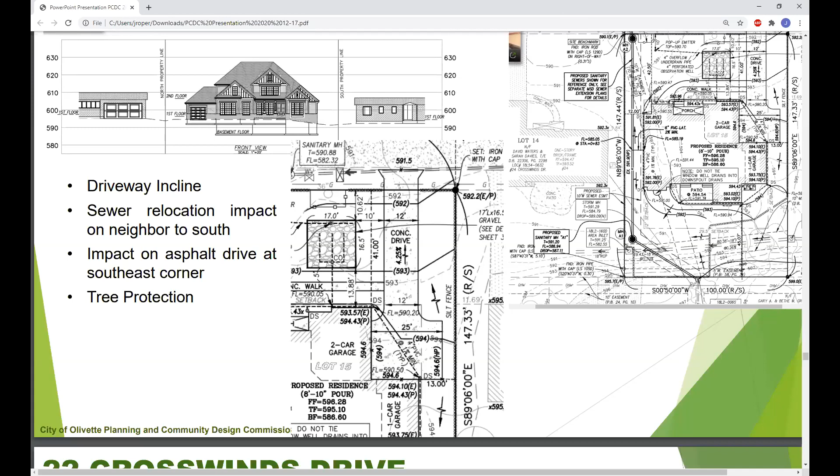Tree protections are certainly things we can take a closer look at. We want to try to maintain as many of the trees as we can. I guess the one question I would have is, you've alluded to discussing with the neighbors about the excavation process as it relates to the sewers. How do you envision that? What exactly is that? How does that work? Are we supposed to reach out to them, get something formal back from them? Any details you can provide would be helpful.

I guess I don't know if you want me to get into it, but the basic house is a 5-bedroom, 4.5 bath, approximately 3,800 square feet on the first and second floor with a finished lower level. As Jonathan alluded to, it's mostly a hip roof, so on the periphery, the outside of the house, the roofs are sloping away, which I think helps with the mass. There's a lot of windows, natural light. This design evolved over a period of time working with these people. I'm certainly happy to answer any questions.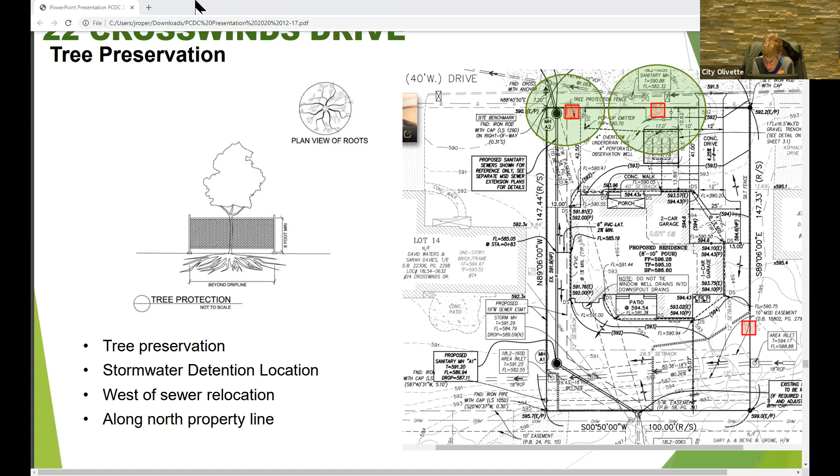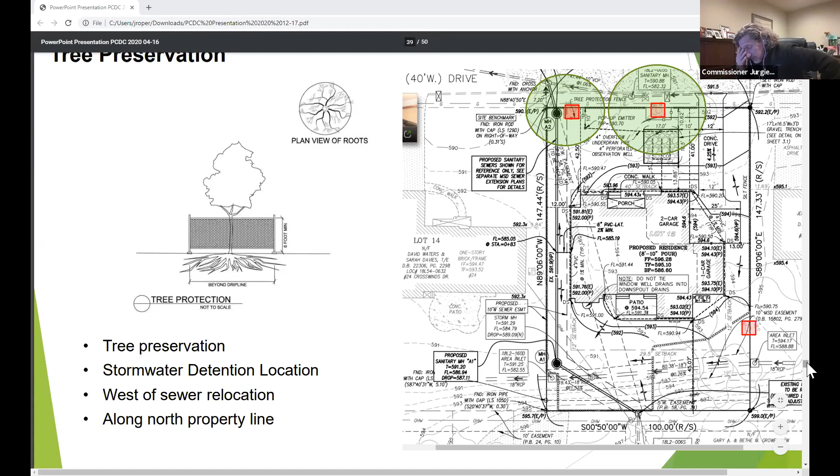Well, Carol, I'll say something. I personally like more stone, but I'm not the architect of the group. And if everybody else is okay with it, I think I could be fine with it as well. It's a nice home, don't get me wrong, but I was looking for these photos online, and I think these are all examples that were provided, all newer homes, recently built. As I said, the inspiration for this particular house was at 8 Lynn Court, and I think that was just completed within the last few months or so.

Gotcha. Hey, Rob, yeah, they're in our package. Maybe you've seen them, but they're in the package we got. There's 4 of them. Okay, let me check. I'll check that out. Yeah, this is Mike.

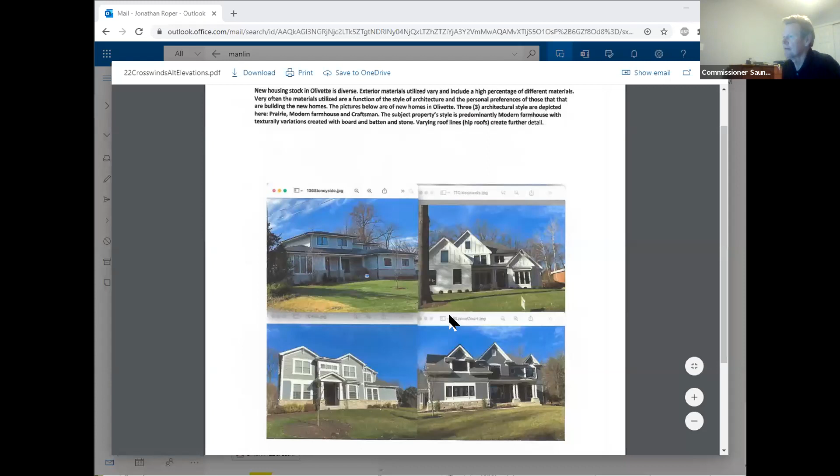I'll throw my 2 cents in. I think the elevations look fine. I don't know that we're gaining anything by asking for more stone across. I think given the architectural style he's trying to achieve, he's done a nice job. Good.

Any other questions from the commission? I have one comment that I'd like to make. I'm a little concerned about the number of outstanding issues here. I'd like to see things a little more tied down or settled, if you would, before we actually approve.

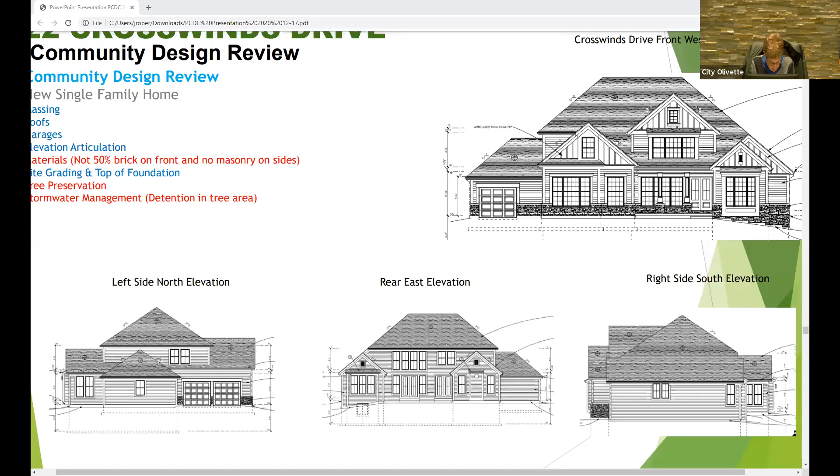Is there a reason that you're pushing this?

We're not pushing it. This has been a process we've been going through for several months. We're obviously anxious to get started. I believe the issues at hand are pretty easily resolved. The main one is the sewer, but that should be resolved in the next couple of days or so. Some of these issues regarding tree protection and the slope of the driveway are kind of a normal situation we deal with on most houses. I've met with the staff in the past, with Carlos and Jonathan, and with a stormwater consultant. We've been able to navigate through the process after the planning commission's been involved and approved. So I don't think, based on my experience, that we're asking for anything we haven't done before, and I don't think it's unique to us.

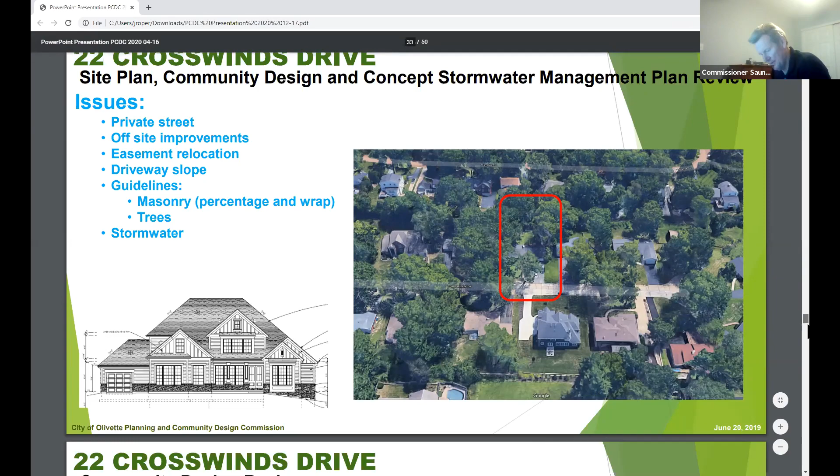Okay, does anybody else have a similar reaction, or are you guys pretty comfortable? The only one I was going to ask about, this is Mike, is the tree protection plan - just confirm that your plan is to meet what's on the detail and what's shown on the site plan, and do a tree protection that's close to the drip line versus just around the trunks of the trees.

Certainly, yeah. I recognize we've got to cover the drip line, so we would most certainly do that.

Anything else? Any other questions? There is one thing, Chairman, as Carlos, the planning director, to make sure it's clear - there is an easement that runs through this property right now at an angle that they're proposing to amend. I think Jonathan's noted it in that slide. That easement looks like an MSD easement, and the utility will be realigned, but that easement still exists, and we're not authorized to issue a permit for a structure over an easement. So I want to make sure it's clear, because the report notes the petitioner is going to have to submit a vacation plat to get rid of that easement, and I'm sure MSD is going to require an easement for the reconfigured line. Those issues will have to get addressed, because as a future buyer runs title through here, that easement's going to exist and pose a problem.

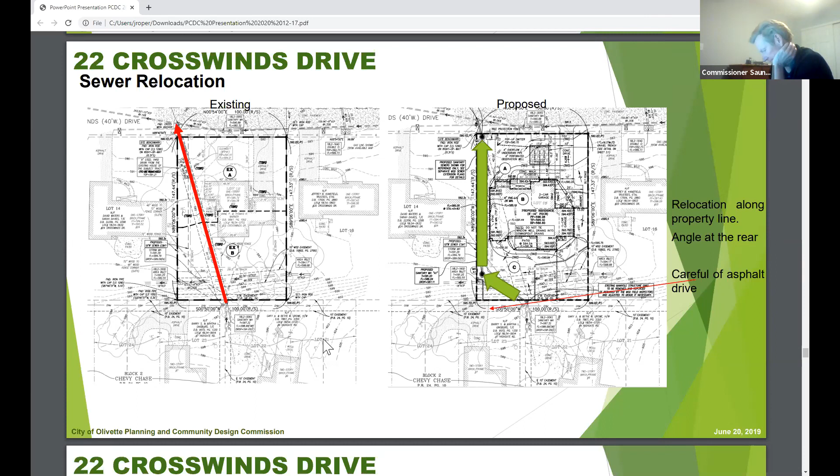Yeah, and they can't vacate the easement until that sewer line's relocated, so there's a lot of work that needs to be done. They need to get MSD approval first to relocate the line and get the new easement accepted and the old one vacated. For sure, and as I said, the process has been started. I think we're very close and certainly aware of what needs to be done, and we will do it.

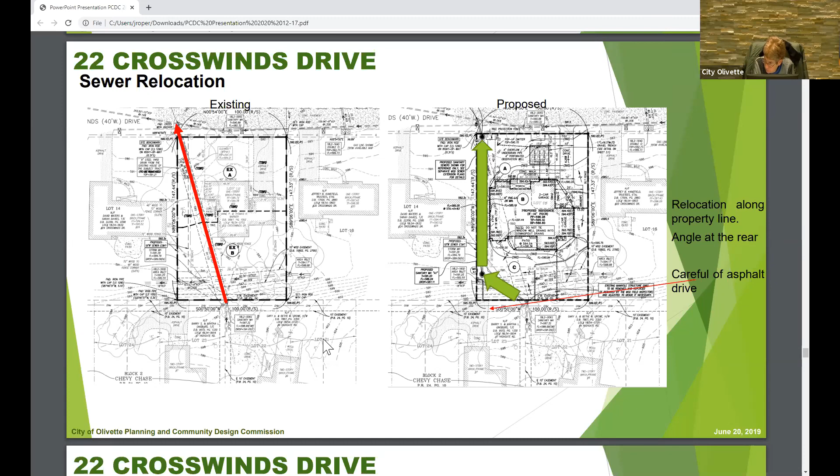And then lastly, under tree protection, Jonathan, if you can go back - this is one of the things, because the city needs to give us clearer direction at the council and legislative level regarding tree preservation. Right now we have guidelines that Jonathan is referencing and does really well, trying to preserve the integrity of a lot of the tree root systems and overhangs. But when you look at the plan, there's a sewer line right next to the trunk of the tree at the southwest corner - it's going to be in the root system.

There's also the detention system underneath the tree canopy, centered there, and on the other side of the tree is a water line. So while we can do our best to try to preserve them or minimize disruption, they're going to get impacted. It always comes down to whether we try to preserve these trees now, or we're dealing with a property owner 5 years from now saying your tree's dead and you need to remove it. I don't know which is best.

I think the reality is, the way this design is set and these existing trees are placed, there are utilities pretty close and adjacent to them, that whether new construction or even if they just replaced the water line on the street, they're going to dig near the root system. There really isn't any other option or alternative. It would be better to consider a tree swapping - a caliper for the number of trees or something - to try to preserve them, knowing that in 5 years I don't know what the health of the tree is going to be.

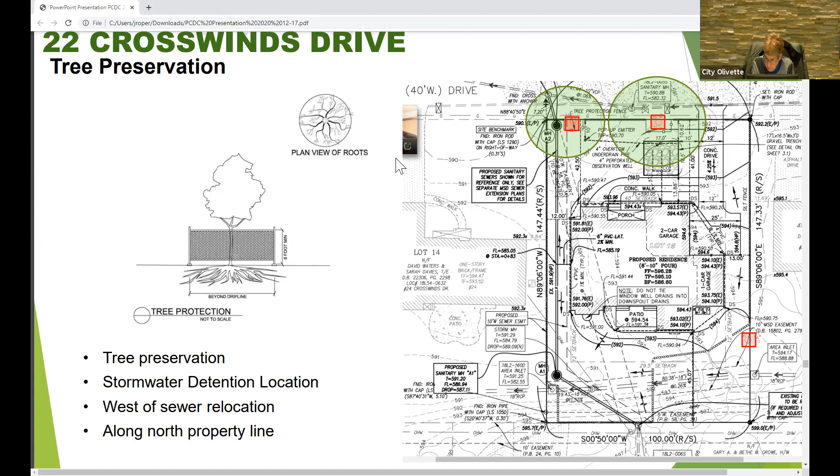It seems to me, Carlos, that looking at the possibility of replacing that tree might be a good idea, because I don't really see that it's going to survive. Maybe a great tree, but - yeah, I mean, again, I have confidence in Mr. Manlin that we can work together and come up with some solution. And given that it is pre-sold, you have a client that also probably is going to have some interest in it too. Yeah, I'd love for them, if possible, to have some input if we can do that. Jonathan, you're comfortable with that, sir? Yes.

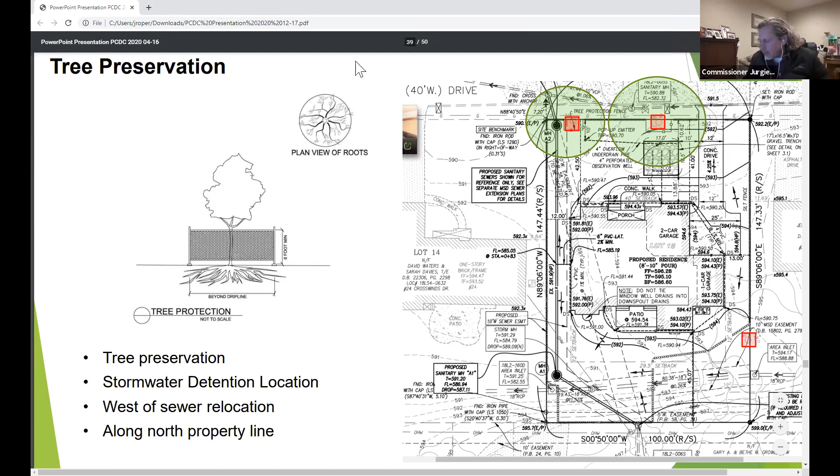Anything else from the commission? Carlos, do you have anybody else in the audience who wants to speak to us? Let me take a quick look. And we have one attendee. If there's any questions, if you can just show your hand.

Mr. Manlin, we did talk, Crosswinds is a private street, and the city is working on an effort to coordinate with private streets a little bit more closely during construction. So we will require a meeting with the trustees, the public works director, and yourself as one of the conditions here, to kind of inventory the street before construction starts. Okay, sure.

And Chair, there are no further questions.

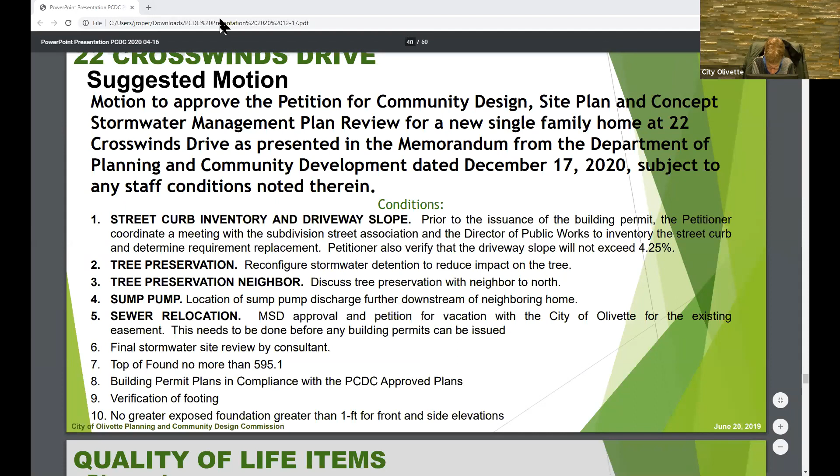Okay. Carol, I'd like to propose a motion. Yes, Rob. I'd like to propose a motion to approve the petition for site plan, community design, and concept stormwater management plan review for a new single-family home at 22 Crosswinds Drive, as presented in the memorandum from the Department of Planning and Community Development dated December 17th, 2020, subject to any staff conditions noted herein.

Is there a second? Second. We have a motion and a second. Any further discussion? Carlos, can we have a roll call vote?

Commissioner Lewis, approve. Mr. Spiegelglass, approved. Commissioner Saunders, approved. Commissioner Rich, approved. Commissioner Jurgiel, approved. Commissioner Wagner, approved. And the motion passes unanimously.

Thank you for your time. I appreciate it. Happy holidays. You too.

Okay, Carlos, we're moving on to discussion items. And the first item is urban agriculture, formerly quality of life. And as I understand it, we are deferring that. Is that correct?

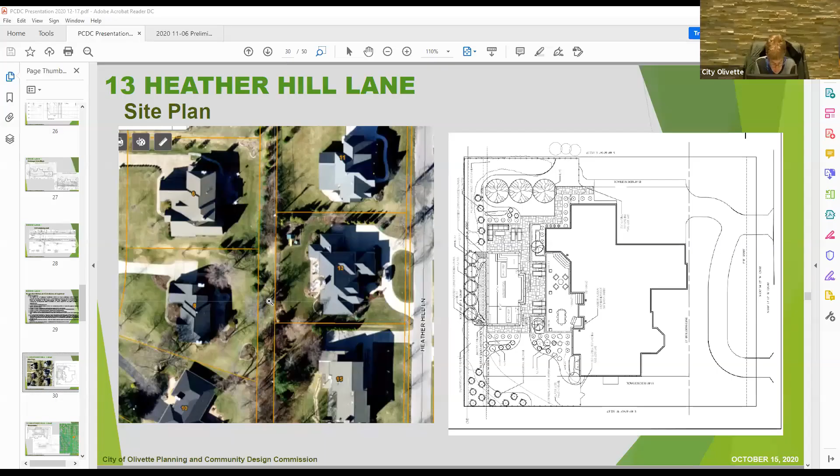Correct. We are going to have continued staff discussions with the city attorney, and Ms. Sondag is coordinating a meeting with Mr. Martin to continue some of the discussion regarding the directive of the council, the placement of the ordinance in the proper sections, and then the comments that were discussed at the commission level with Mr. Martin last week.

So the goal here is we hope that on January 17th we'll have an informal public hearing, because we're going to send out notifications next week to property owners that we know either have hives, chicken coops, or native vegetation areas that would be impacted. This includes bamboos and roosters, and give them an opportunity to address the commission if they'd like.

And then on the 21st, the council's asked that if the commission can act on some form of an ordinance, so they can consider that at their February work session.

That's a brief update. And I think from the city attorney's discussions that we had last time, some of the issues he had brought up were specifically whether this is best addressed under the zoning regulations or within the animal ordinance. That's one of the things we'll talk to him about, and what the overall directive and goal was of the council. Two, about the variations or variances, because I think what I've heard from the commission, there's strong support to have some process. And I think Mr. Martin wants to make sure that the process is not arbitrary and such.